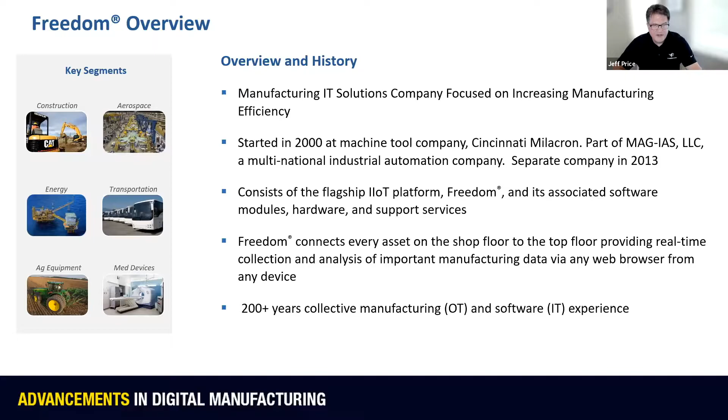So today, what I'd like to talk to you about is a little bit about the advancements in digital manufacturing. As you know, there's a ton of buzzwords out there, a lot of jargon, that sort of thing. So I'm going to go through a little bit of that and then show you a little bit of the advancements, and we'll probably talk a little bit about some impediments potentially and ways to overcome. So first to start off with, what is digital manufacturing?

It's really technology that links all your systems and all your processes from the start to the end of all the areas of production with an integrated approach, which is really what we're going to talk about a little bit — the digital thread for manufacturing, from design to production and on to servicing of final products.

What is Industry 4.0? You've heard people talk about that, and about the industrial Internet of Things—they're fairly similar. Industry 4.0 is termed the fourth industrial revolution, fusing everything we learned from the other three: mechanization, mass production, and the introduction of computers and technology in the 70s, to now where we're integrating the physical, digital, and even biological worlds. That phrase was termed a lot in Germany and Europe. In this country we tend to call it Industry 4.0, but also the industrial Internet of Things.

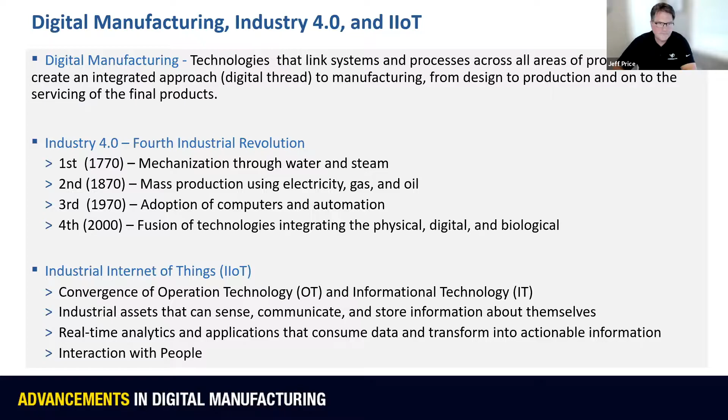Some of the benefits—since this is a field we play actively in, our goal is to help our customers increase their production margins and profits. How do you do that? Oftentimes through efficiencies, through productivity improvements from being able to run equipment a little more efficiently, a little more often, so you have increased output. A lot of this leads to other side benefits: if you can turn your inventory more often, you need less inventory. That helps you be more nimble and react to your demands quickly and productively.

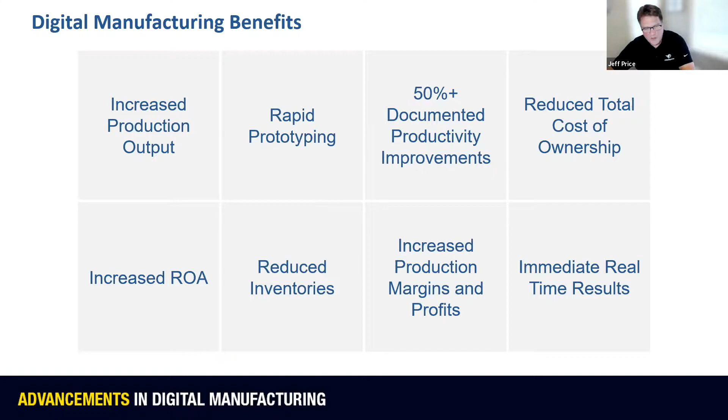The current state of digital manufacturing—I'm going to talk a little bit about both advancements and challenges. We're going to cover a lot of these topics, get to some challenges, and then have a few minutes to talk about ways to overcome and move forward.

Let's talk a little bit about digital twin and digital thread. For me personally, these were sometimes very nebulous, confusing terms. You hear a lot of people throw out the word digital twin—what that really means is I've got a virtual environment that mimics the physical environment, so in the past you could create, build, and even test products virtually before doing it physically, or do it in tandem and problem solve. People are really focused on digital twins, and today there are elements of that, or maybe islands of automation, that fall into digital twins.

Some examples: CAD models—you have a CAD model of the part, giving you a pretty good idea and visualization of what that product will look like when manufacturing is done. You can take that further with an integrated CAM model to generate a G-code program. But a lot of these systems, while integrated, are still fairly separate. If you wanted to review how manufacturing would take place, the CAM model might let you simulate and look at toolpath. But to really look at it holistically, modeling off the G-code you created, you could use programs like Vericut to look at it even further. These are some examples of digital twins.

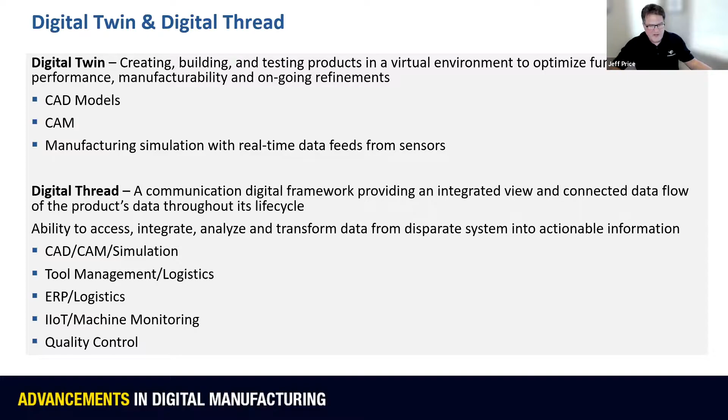Okay, so let's talk a little bit about IIoT and machine monitoring and the advancements in that area. We participate in IIoT ourselves. That is our main business - IIoT and machine monitoring. We've been doing that for quite a while.

When it comes to IoT, we're really converging operational technologies and informational technologies. A lot of this technology can be deployed both on-premise or out into the cloud. It's really about real-time analytics and applications, and a lot of it started off with OEE - how efficiently are you running the equipment, and when you're running it, are you running at rate, and what's the yield out of all these processes. That's how all of this began with machine monitoring, a large focus on OEE.

It has now moved on to more than that. Add a little more of the IIoT technology, which is more sensor-based - a lot of this equipment already has a wide variety of sensors, but you can also now inexpensively deploy even more sensors to processes. Those sensors can do, instead of just on and off type of data like is the machine running or not, you can now look at analog type data - temperatures, currents, pressures, even fluid chemistry. You can look at concentrations of coolant, conductivity, pH, all that sort of thing is now available. It will tell you a lot about the health of your machine, but it can also tell you a lot about the health of your process.

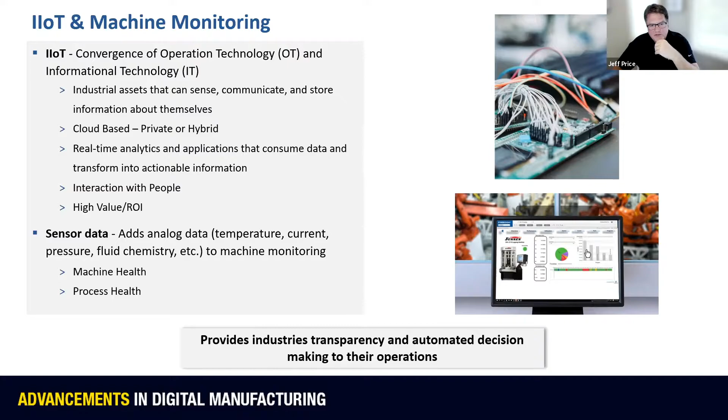So I'm going to throw up a dashboard here just to give an example. Okay, so this is a dashboard, and it actually comes from some of our software applications. There's a lot going on with this dashboard. Let's just talk about a little bit about the sensor technology.

What you see here is the deviation from nominal of a diameter. Zero would be perfect, and we're deviating up to about, let's say, 12 tenths, as high as here. This had a closed loop feedback, so you can see the process would correct itself, and then it would drift, and then it would correct itself again. Each one of these is happening at about a 10-second clip.

So we're actually getting some measurements on the quality of the process. We turn right back around and we have some performance related OEE type of data, where the availability here would say this particular machine is running or adding value 86% of the time within the time frame we specified. And when it is running, 71% of the time it's running at the right rate or the right velocity, right cycle time. And we have about a 92% yield. When you multiply all those together, you get about a 57% OEE.

We collect all of that in real time, along with some of this process related data. Over here we have some more information about cycle time, so we can look to see if this is our expected cycle time of 10 seconds, and see how well we're achieving it from part to part. You can get analytics here that would show you for this particular part, how many we've made, what's our average cycle times. You can also understand how many parts we're making per hour versus a goal and see what your part variance is. So there's a lot going on in real time, but you can look at it at a glance and glean quite a bit about this process.

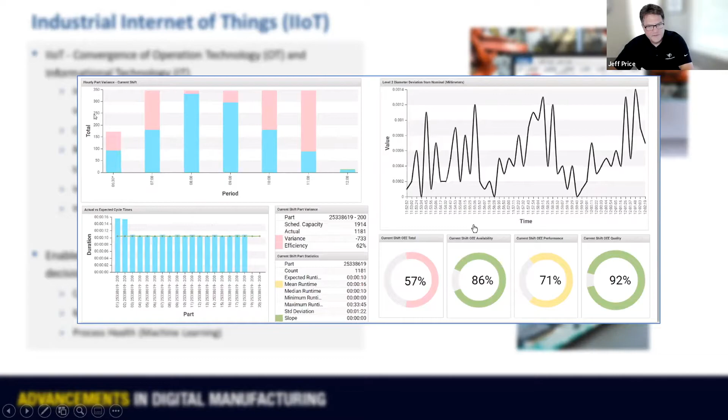Now that you have some of this data, some analog data, some digital data, you can start to apply techniques like condition-based monitoring and machine learning. Condition-based monitoring has been around for a little while, so it's not necessarily new, but it's coming into its own because it's now easier to get the data you want and then apply rules. That's what condition-based monitoring is about, rules for thresholds, averages, trends, or things of that nature.

The use cases here, the one that's really obvious is maybe runtime maintenance. You could say after I have this many spindle hours, just like an hour meter on your machine, then I need to do some maintenance. You could also look at other wear components, such as how many tool changes I did, how many ball screw paths I took, or what my spindle load is, and then you can do some runtime maintenance.

Machine health - I mentioned spindle load, so how often am I putting this spindle under duress? What kinds of vibrations am I seeing? The machine itself probably has that on board so it'll keep itself from destroying itself or causing harm. But you can also record that, and get text messages and all kinds of things when these conditions happen that you'd like to know about.

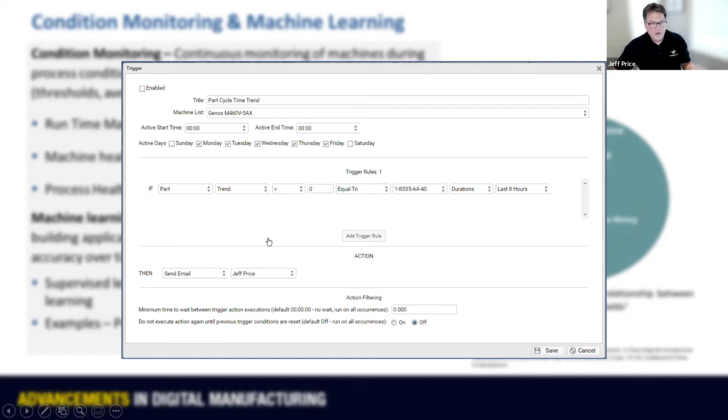Other advancements in digital technologies is that mobile technology is everywhere. Everybody's got a cell phone, and we see more and more tablets out in the manufacturing workspace. They've become easier and more cost effective, and they're very familiar to everybody. People know how to use them, and they're very portable and efficient. The cost has come down dramatically.

Some of the challenges with this type of technology is you still have all the connectivity piece, so you still have all the security challenges. You still have the Wi-Fi networks that you have to manage and figure out where you can access it, and make it easy to access. Probably one of the other challenges is how do you manage all those tablets? They're portable, but that means you've got to have your arms around it and understand what's deployed to them. So there's endpoint management software out there, and I think it's becoming more and more relevant as people try to get their arms around this mobile technology.

It was easier when you had PCs sitting on the floor that didn't move around, so the fact that they're mobile and you're trying to manage this whole fleet of tablets or mobile devices, that's really the challenge. But it is really handy for things like machine monitoring and real-time KPIs. So if you think about some of the things we just talked about, I can get text messages and email reports about how things are running out on the shop floor as I'm walking around or I'm in meetings.

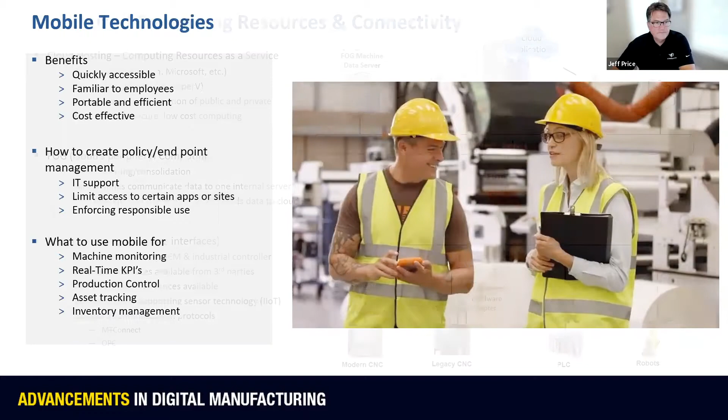Another advancement is the use of distributed computing resources and connectivity in general. What I'm showing here is an example of an IIoT architecture. There's all kinds of different ways to do this, and this is probably one of the more simple ones. In this case, we're making use of different kinds of computing resources located in different places. Let's start with ones that you're probably familiar with.

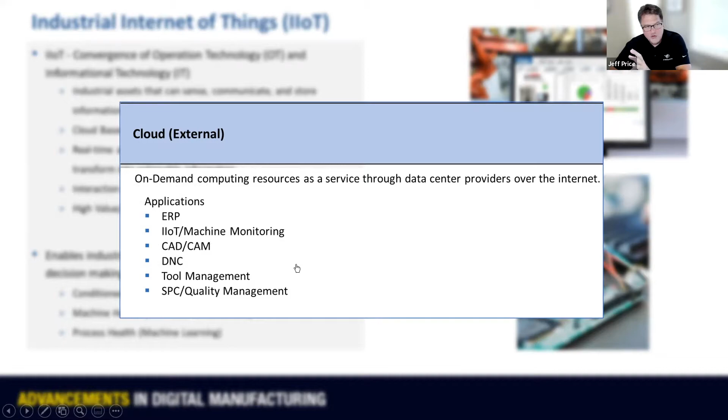Cloud hosting is one that we're familiar with. Probably the two big players out in the market are Amazon and Microsoft. We have some experience with Amazon, and I would say they have made it very cost effective and easy for you to deploy applications to the cloud. You can see different kinds of computing resources as a service, and then you can get different kinds of applications such as ERP, machine monitoring. Everything that you can do now, you could probably get in a cloud computing resource. The question is whether you should or not, and that has to do with some of the security issues.

If you're not going to use it in a public cloud externally, VMware and Hyper-V are virtual environments that have really gained a lot of popularity in recent years to where you can do this on premise, with virtual machines using that type of technology. You can even do a hybrid cloud with a combination of both public and private. It's all about being fast, scalable, secure, and really low cost computing—that's really what cloud hosting is about.

Now, when it comes to fog or the periphery, when you're communicating in a machine monitoring environment, the one thing you don't want is all these machines or assets going straight out to the cloud. That's not recommended, it's not secure. So you usually have some sort of fog node that's there locally, where everything goes, and then this particular resource will post things to the cloud. All your real-time machine interfaces will live here, data warehouses can live here, your data lakes—other types of things that can communicate to the cloud. So in this case, all these machines report here first, and then this one device or server can post that out to the cloud securely.

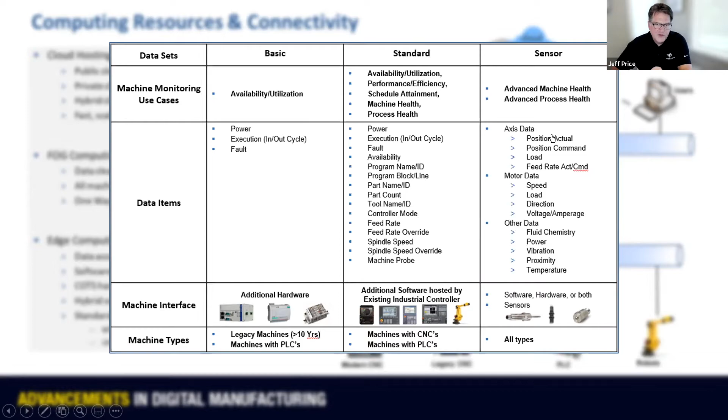There are different kinds of standards when it comes to how machines or these devices communicate to the cloud or to other applications, and there's probably two prevalent protocols right now. MTConnect was established by the Association for Manufacturing Technology in 2008, and their whole goal was to provide a standard of how machines or manufacturing assets communicate externally to other applications. So you have a very complex data dictionary that says when the machine's in cycle, I know that it's this data item - it will always represent whether it's in cycle or not. It's a really nice standard that a lot of work has been done on.

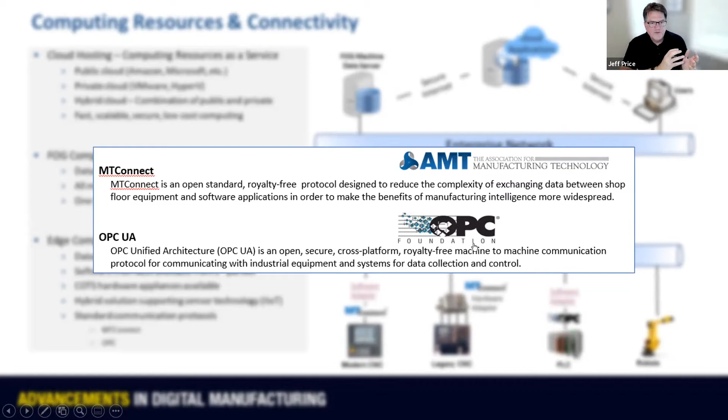OPC is very prevalent in the PLC world and other worlds as well. It too can provide a standard, but it really provides you a nice mechanism to connect and actually get information from different types of devices. These are the two you'll want to look for when you're establishing your architecture.

So let's talk a little bit about some challenges. The one that probably comes to everybody's mind is security. There's lots of cyber attacks in the news every single day, ransomware, all this sort of thing. You have to think about machines that you're suddenly going to plug an Ethernet cord into, and have concerns about viruses on your assets. You have to think about that you really don't want these things out on the internet themselves. And a lot of these machines, you don't want them to automatically update their Windows environment automatically. So there are some things to think about.

Cloud computing concerns - my data now lives out in the cloud. What kind of concerns should I have in that regard, and what is the mechanism? Is it encrypted on how I get that data out there? The good news is that there's a solution for all of that, and you saw a little bit of that even in the architecture I presented prior. A lot of that is in place already in a lot of factories today. So the good news is I don't think it's a showstopper.

I think more and more companies are feeling more comfortable with the cloud. Now, I will say the manufacturing community has probably been the most conservative bunch of people when it comes to moving to the cloud, but it's getting there. We're seeing more and more cloud deployments ourselves.

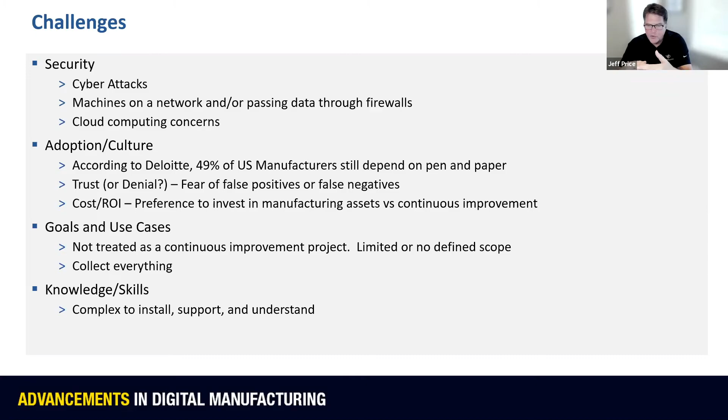Okay, so how to overcome this? I think the key is that it's really cost effective for an IIoT type of deployment. A 3% improvement in your performance will typically pay for this kind of an investment in a few months.

A lot of times you can actually treat it as a continuous improvement project. Launch it with some fanfare, and you will see great returns in a short amount of time.

It's pretty easy to deploy, pretty easy to use. A lot of this network infrastructure that I touched on earlier already exists, so it's just a matter of plugging into what's there and fleshing it out further. It's not one of these projects that's going to linger for months and months.

It's getting better and better to where you can deploy this in days or weeks. We typically see at least a 10% productivity improvement just in the first month it's deployed, and that usually represents a pretty dramatic increase in profit margins and inventory turns.

As far as adoption, anybody with a continuous improvement mind will find this a great tool. It's actually a companion tool for lean and agile continuous improvement. Back when lean manufacturing started, everybody was doing this with pen and paper and just observation.

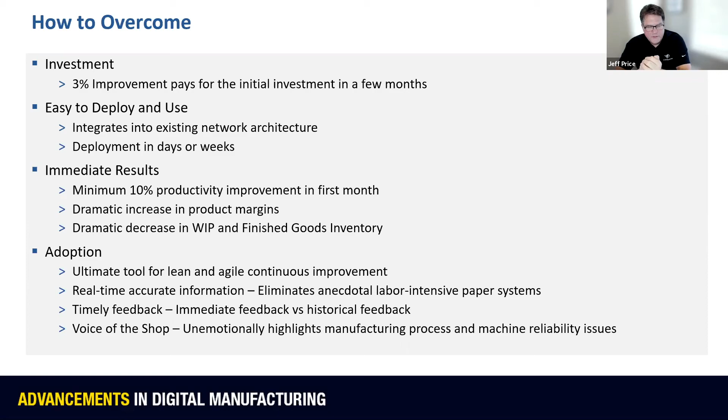Some strategies: begin with the end in mind, but just get started. One of the biggest challenges to any kind of project is just launching. Clearly define your problem and how you want to measure success. You just got to put it into SMART goals.

You'd say, I'd like to double my inventory turns in 6 months, I'd like to cut my cycle time in half, I'd like to double the output of these critical assets. You can put it in very operational terms that then you can drive into informational specifics, so you can identify where those pain points are in those use cases.

Take a minute to assess the culture. Is your culture continuous improvement or status quo? Look for those champions that are continuous improvement minded, and select an operational champion. It's not really an IT project. Make it operational, and then use IT people to help drive it.

Figure out where your limitations and constraints are, maybe your investment, your return on investment. At least know what that is financially. Assess what kind of equipment will need to be connected. What's your critical assets, and what kind of data are you looking for?

Then just look for quick wins. If you can get to the bottom of one issue and dramatically improve upon it, it really helps the culture move forward. It helps you gain some groundswell.

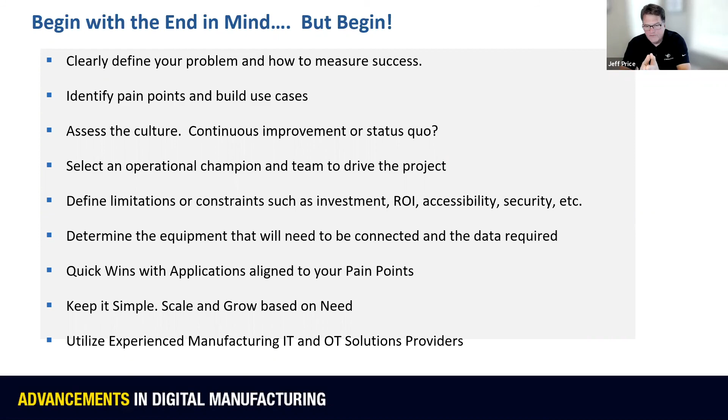Keep it really simple. Start off slow, scale it, and then grow based on your needs. Use an experienced manufacturing IT and OT solutions provider. They can help you. Each company has to do it themselves, but they can also use other providers that can help them do it.

I hope that you got some benefit out of today's discussion on advancements in digital manufacturing. Feel free to visit our website, or feel free to drop either one of us emails or ask us any questions. We'd be happy to answer them and work with you and your team.